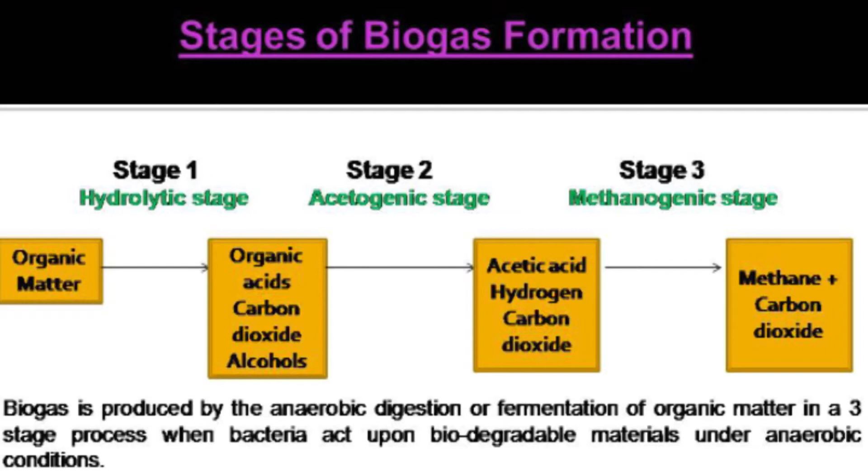Biogas is about 20% lighter than air and has an ignition temperature between 650 and 750 with 20 to 26 megajoules. It is a normal thing. As most of you must be knowing, this is a 3-stage treatment process, from organic matter to organic acids, carbon dioxide and alcohols; that is the hydrolytic stage, stage 1. The acetogenic stage is the next one, and the last one is the methanogenic stage.

Because we have to control the production, that's why I am discussing this. This is done by basically 3 types of bacteria: aerobic, facultative, as well as anaerobic ones. The constitution is the same. It has got some hydrogen, nitrogen, water vapor, as well as traces, but these are the few things I want to discuss specially.

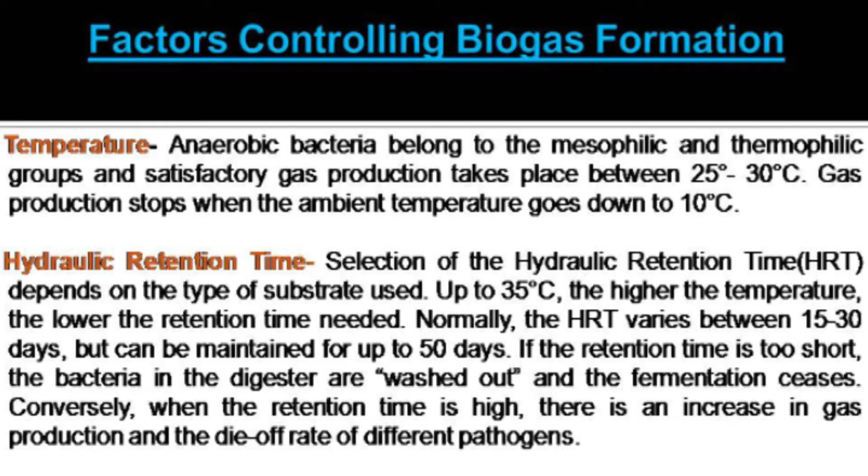Factors controlling biogas formation, especially with respect to our human waste biogas plants. Temperature is to run between 25 and 30 degrees. The best satisfactory gas production takes place in that temperature range. It of course shows that gas production stops when the ambient temperature goes down to around 10 degrees.

But we have installed a human waste-based biogas generator in Afghanistan, attached to a community toilet, where the temperature goes below freezing point. What we have done is we constructed it about 1.5 meters below the ground surface level, and it functions perfectly well in any temperature. It works, and it's still working. It was done about 5 years back.

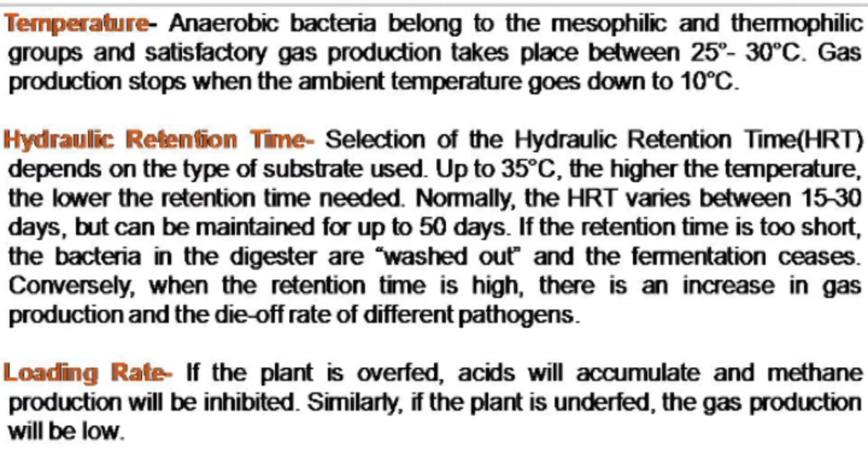Hydraulic retention time. As you know, most of our designs are around 30 days retention time. In India, it works quite well. We have installed, by the way, about 200 human waste-based biogas plants throughout the country. One of them is already located in our premises, that I will discuss later.

And another, the biggest one, is in Shirdi, where 3 biogas plants are working, and daily users are not less than 5,000. Sometimes it goes to 15,000 people using the community toilet system. So we have got 3 digesters over there working. So we can increase this to even around 70 to 80 days also.

But if the retention time is too short, the bacteria in the digester are washed out, and the fermentation ceases. Conversely, when the retention time is very high, there is an increase in gas production, and die-off of the different pathogens takes place. Loading rate is also an important factor. If the plant is overfed, acids will accumulate and methane gas formation will be inhibited. Similarly, if the plant is underfed, the gas production will come down.

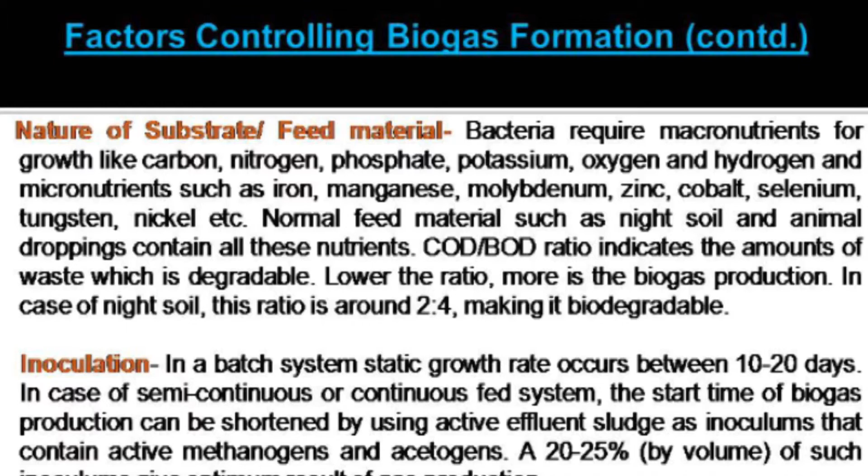Nature of substrate and feed material. Most of the bacteria require nutrients for growth, like carbon, nitrogen, phosphate, potassium, oxygen, and others, which are available in both animal waste as well as human waste. But we are more concerned about the COD to BOD ratio. The lower the COD-BOD ratio, the more is the biogas production. So we want to keep it as low as 2.4. In night soil, it remains around 2.4, which is biodegradable, and it functions pretty well.

Inoculation: in any case, we have to inoculate it, either by gobar or something like that. Generally, we do it by gobar, that is cow dung. And the growth occurs between 10 to 20 days. In case of semi-continuous and continuous flow, it settles down in another 15-20 days, and it functions pretty well. A 20 to 25% volume of inoculum is to be given to get optimum results.

pH is another factor which is to be taken care of in this type of plants. It should be around 7.2 to 8.2. Below 6.5, it stops functioning, so control measures are to be taken.

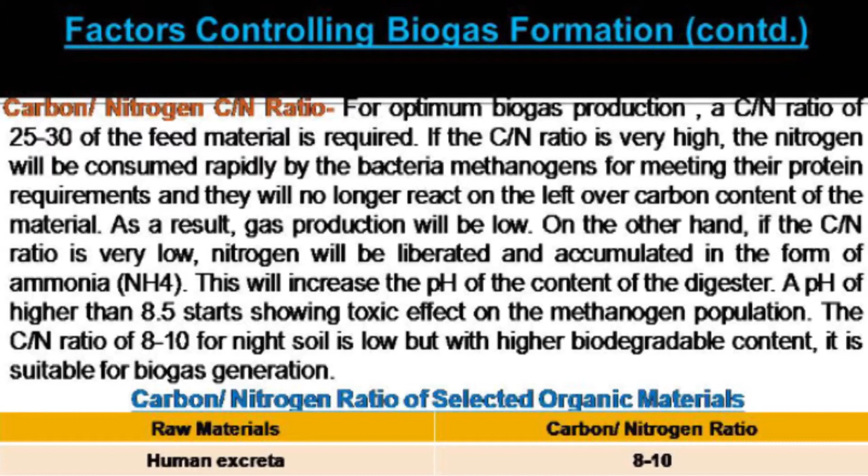Another major factor is the carbon and nitrogen ratio. The optimum C/N ratio for biogas production is between 25 to 30. But in human excreta, the first figure there in the presentation, it's around 8 to 10. But still it functions, and we are getting a good quantum of biogas, and at least we are able to use it regularly.

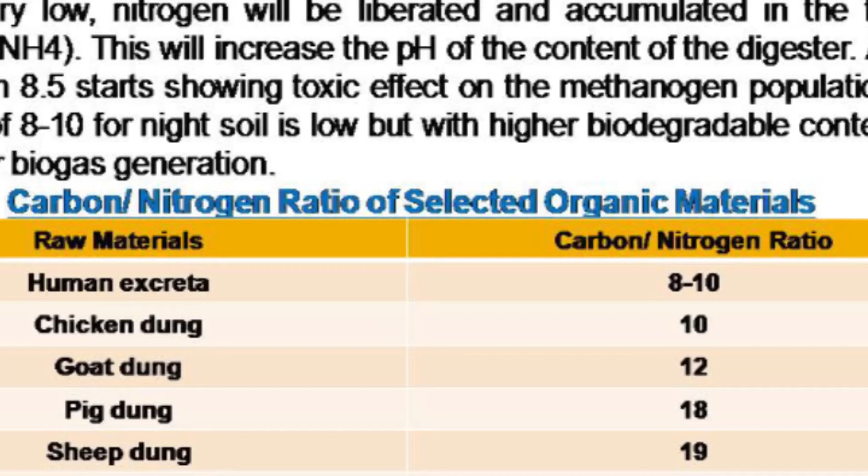Though at that ratio it is functioning pretty well, and we find that this is good for human waste, but not for other waste. Maybe in chicken dung and others the ratio is low, maybe mixing, but we have not experimented with that; this could be discussed separately.

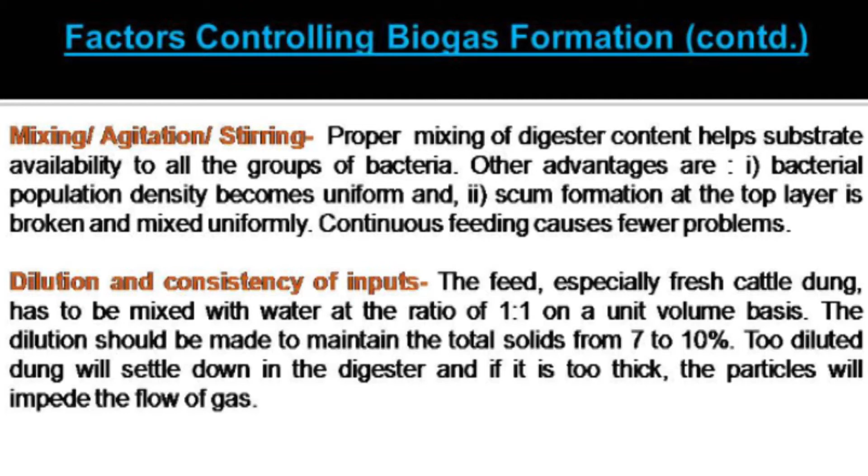Mixing and agitation is required. Agitation and proper mixing of digester content helps make the substrate available to all groups of bacteria. The bacteria family population density becomes uniform and scum formation doesn't take place.

Dilution and consistency of the inputs. In case of cow dung, of course, it is required. But in case of human waste, dilution is a big problem. Because it doesn't work, we have to have low water availability, and that is a bigger problem. That I will discuss later.

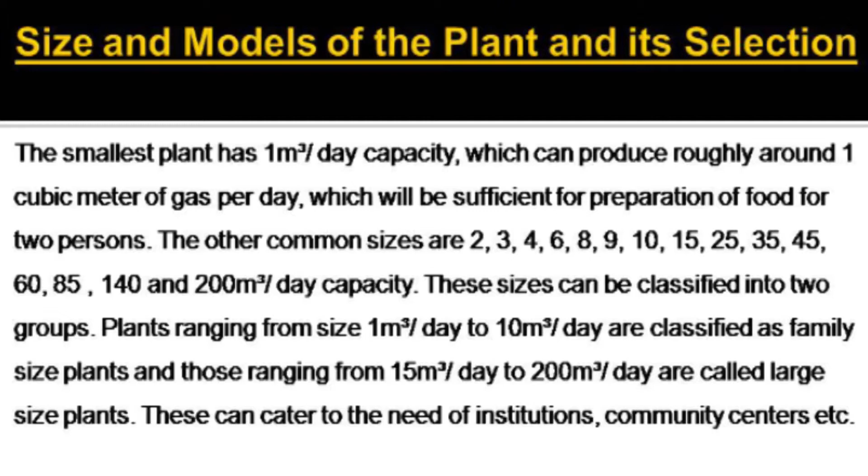These are the capacities of plants, 1 to say 140, 200, 400, whatever is available. But it is very difficult to have big human waste-based biodigesters because the quantum is so small, and to carry that from a long distance is a very difficult job, and because water content has to be kept low.

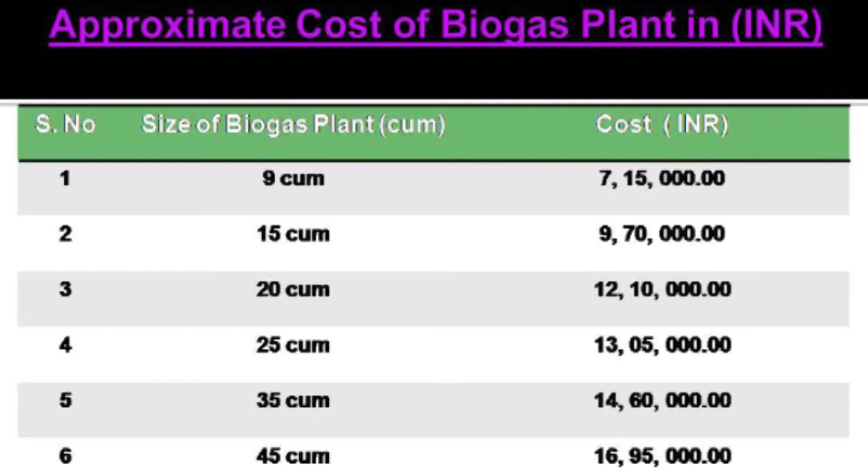These are the basic costs of biogas plants that we have designed so far, from 9 cubic meters to, say, the Delhi plant, which is around 35 cubic meters. It was constructed long back, in the 80s, as I mentioned.

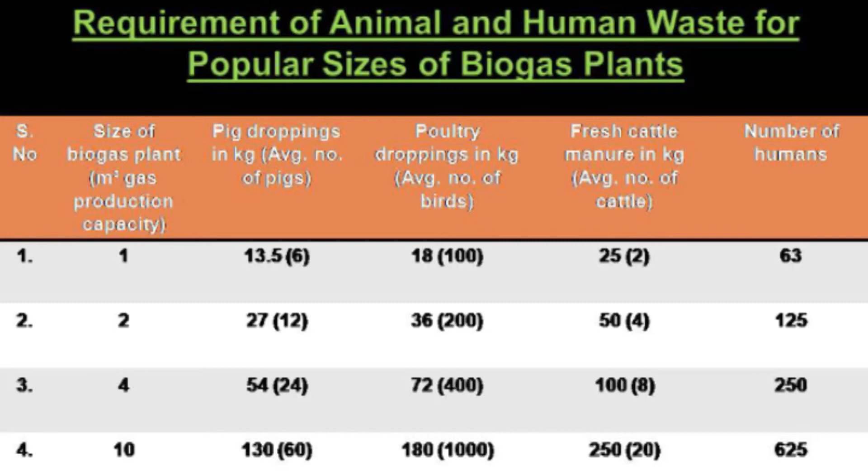It's a huge number. To get the waste collected, and that too in a low water content, and to bring it to one spot for treatment is a big issue. I have myself faced this problem. We were designing for Delhi Police College; they have barracks, each with 200 people, and presently they are asking for 1,200 people to be served.

Now, to get the waste flowing from the last barrack to the treatment plant, we have to go down by about 3 meters first. Then again, since water used in those toilets is very low, as required by this type of digester, making it flow is a big issue. We have to flush it. And we are trying to add some other waste, maybe cattle waste, to make this digester functional. So we are designing for that, and we are finding it difficult, in fact.

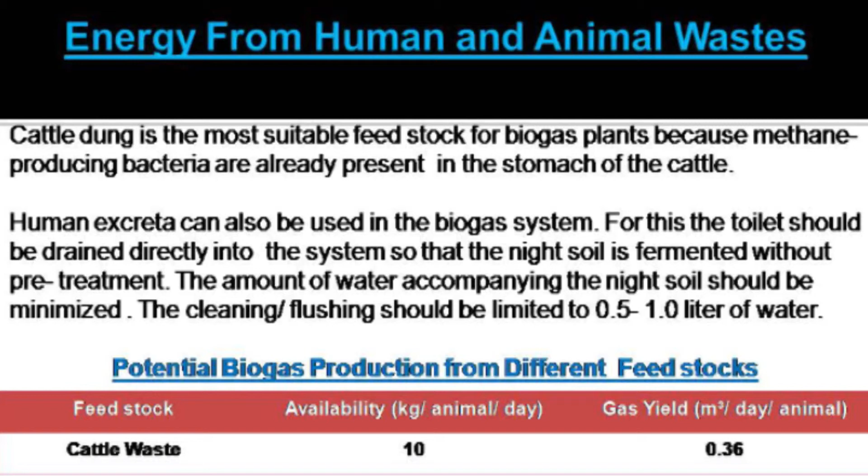As in the next slide, each animal provides 10 kilograms of cattle waste, and it gives 0.36 cubic meters of gas per day. Whereas a single human generates about 0.4 kilograms of waste, and the gas generated is 0.03 cubic meters. Flushing should be limited to 0.5 to 1 liter per capita per wash. So little water, so small a quantity of waste, it is a difficult job.

So we have to flush it occasionally. And if you flush it, the quantum of water in the digester goes up, and we have to have another sort of waste added to make the digester functional.

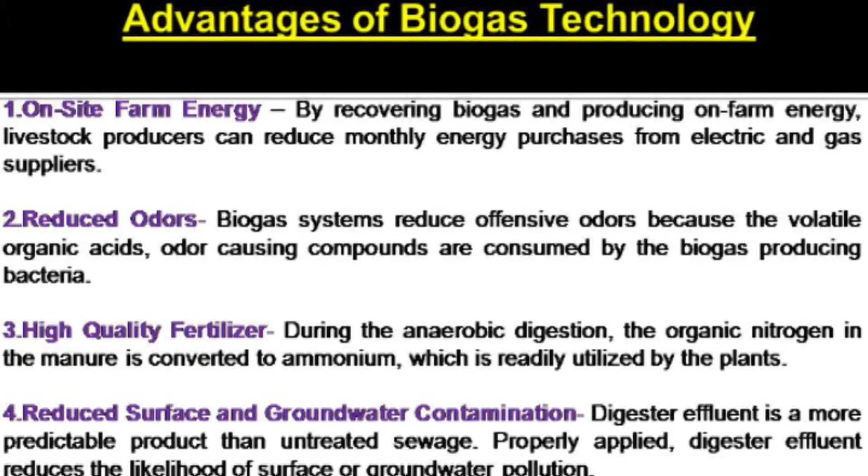There are some advantages, of course. Most of you know about them. On-site farm energy, this has been discussed since morning. Reduced odors. High quality fertilizer, that is the biggest advantage of this digested sludge, which could be directly used, and reduced surface and groundwater contamination.

And the pathogen reduction is very high. If your digester works pretty well, you can remove up to 85%. But if your water is hard water, this percentage comes down, which we are witnessing in our treatment plant.

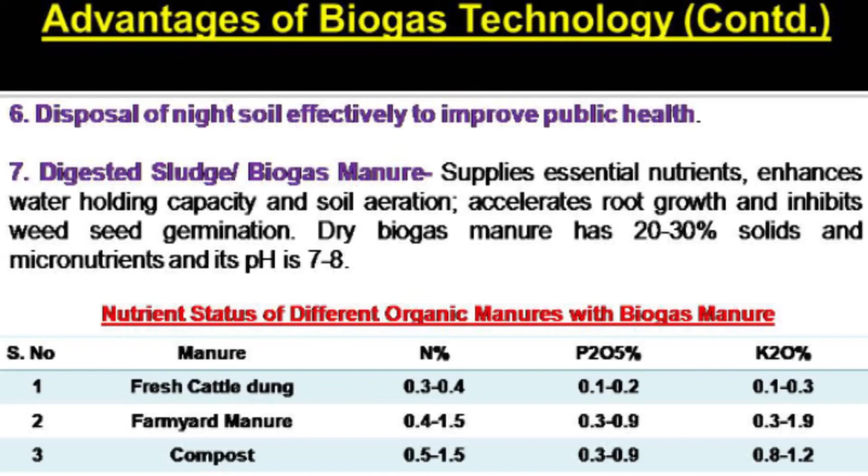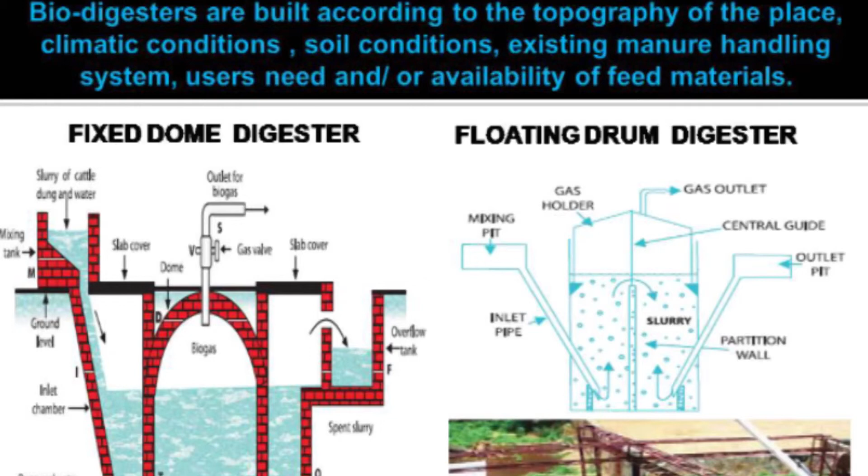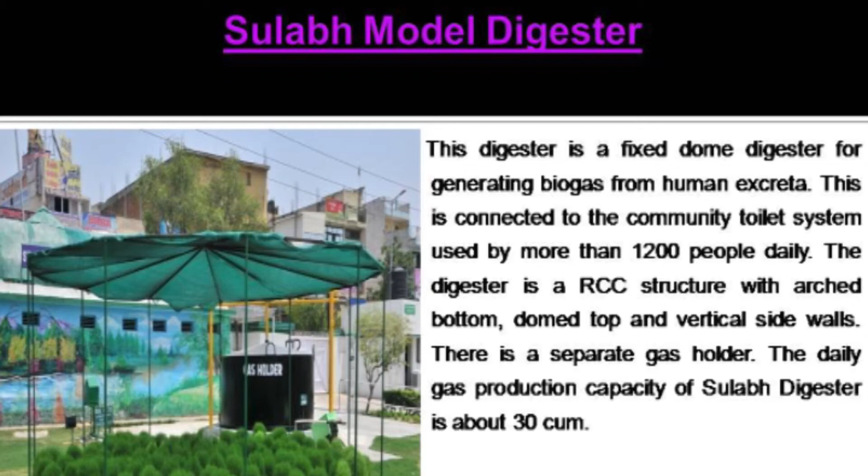All the waste from that comes to our digester, which is about 15 feet below ground. The plants that you see, the digester is below that. And because this was constructed about 30 years back, we had a separate digester and gas holder. The one you see is that gas holder over there. It is written gas holder, the black one. Now this is about 30 cubic meter capacity.

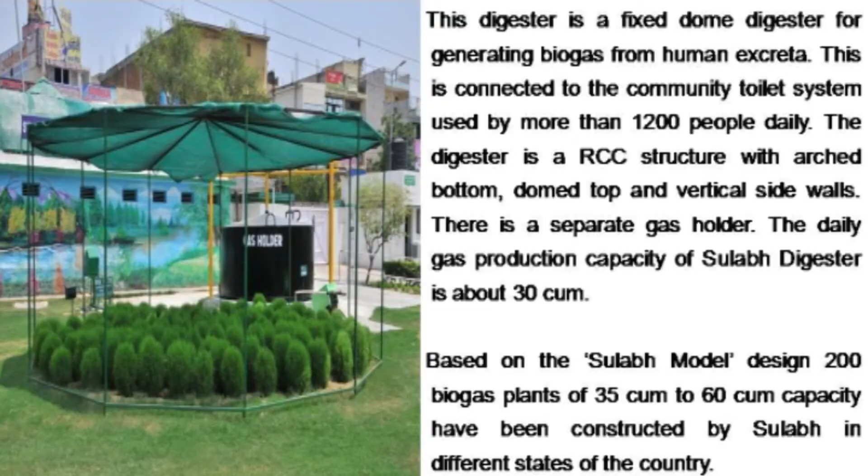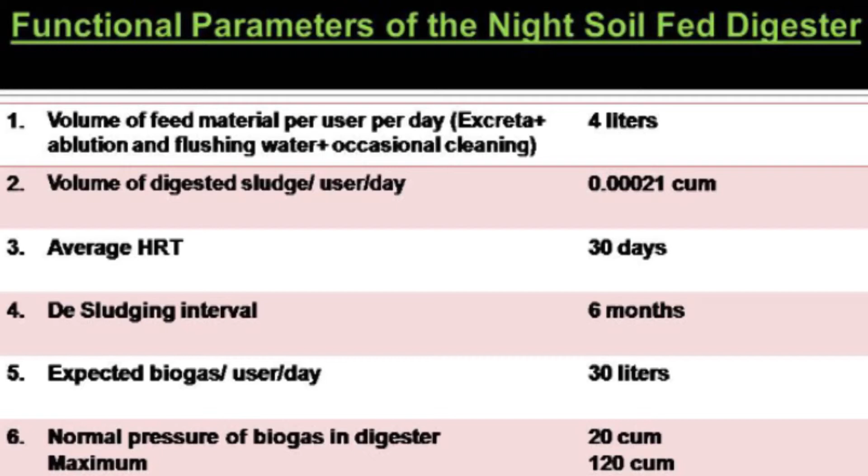And as I have already mentioned, around 200 of these have been constructed. This one is an RCC constructed one. These are certain parameters which we used to design our systems. The minimum flow we are taking is only 4 liters per day. I'm not going to explain all these things. The gas storage space is around 50%, feed material flow is gravity flow.

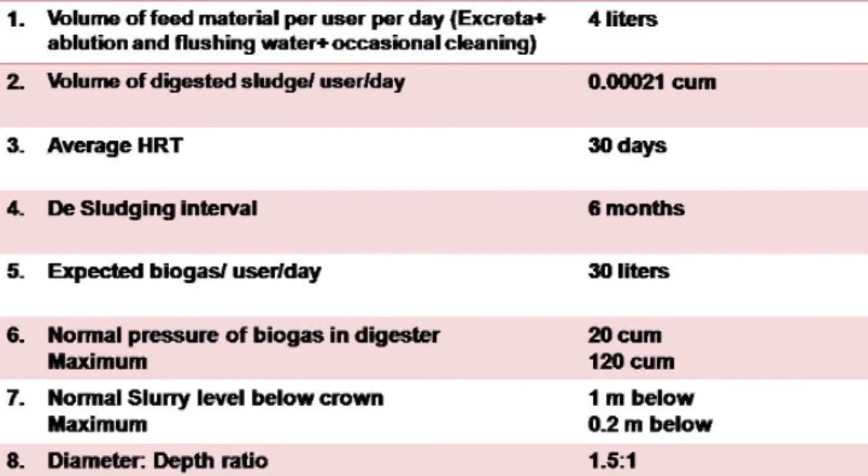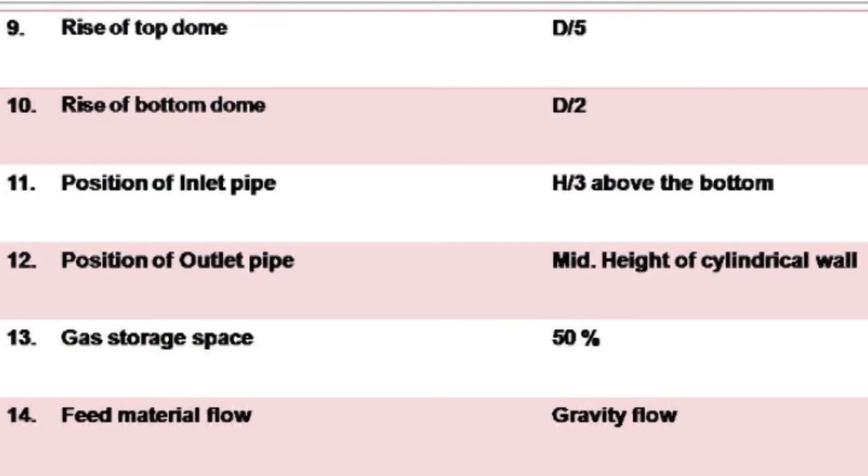In case we are thinking of having human waste as well as animal waste combined, which is feasible, and there is no problem, hopefully not. At least people will use it, thinking that it is animal waste and not human waste. Then we have to see that there should be separate pipes for inlet. The human waste one should be lower than the animal waste one, because otherwise backflow will take place, because the quantity is low.

So what we have designed is that the human waste pipe, which is taking the waste in, is lower by a foot or 1.5 feet than the other one. Now we have used this biogas for many purposes, like mantle lamp burning, but regularly we use this gas for cooking purposes. Every day food for around 40 to 50 people is cooked with this gas, and we consume around 7 to 8 cubic meters. We don't require more than that.

Then there are various factors. We have also got a generator, but we don't run that regularly. It is more for demonstration purposes. Earlier we had diesel plus biogas, but we have converted it; now it is completely biogas without any sort of treatment. We are using it directly in that generator, and it works pretty well. Ours is more of a demonstration pilot project, not a regular working project. But cooking with gas is regularly being done. The others are just to show that you can do this.

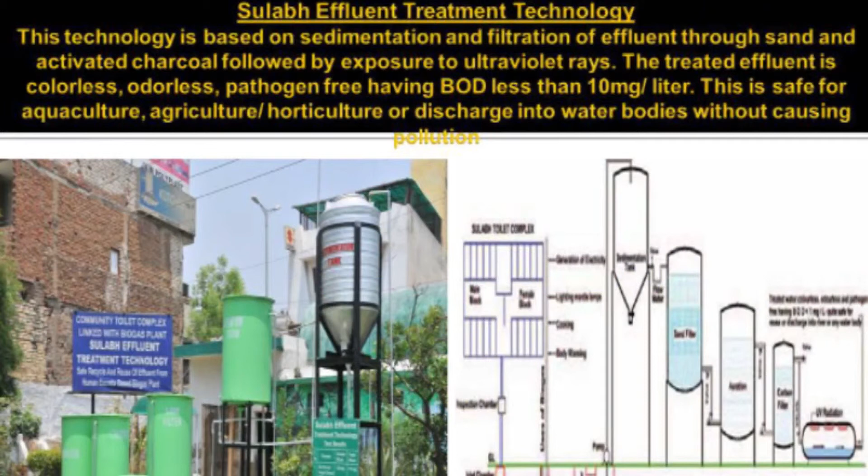This is another technology that we have, for the effluent coming out of the digester. We recycle that water through a sedimentation tank and filtration, then activated carbon and UV tubes. And the BOD is brought down to around 10 milligrams per liter, or 10 ppm you can say. We are using about 2,000 liters of water, and we recycle the whole thing. The sedimentation tank has 1.5 hours settling. Activated carbon, around 10 minutes of passing time. And then filtration and aeration also.

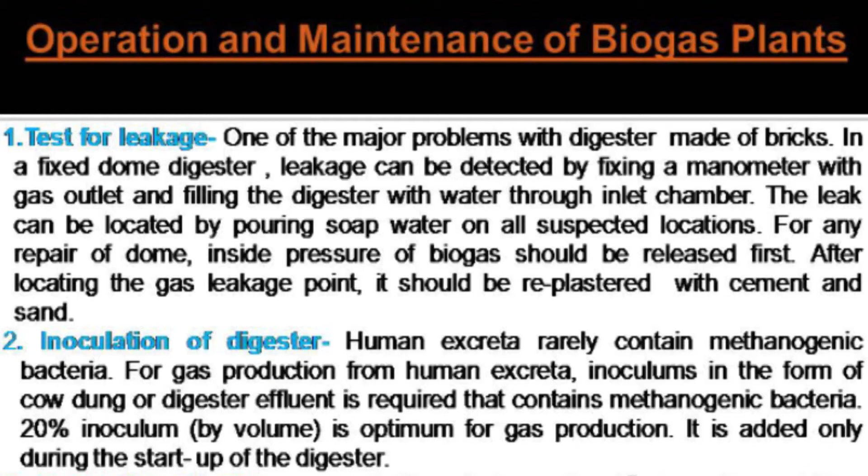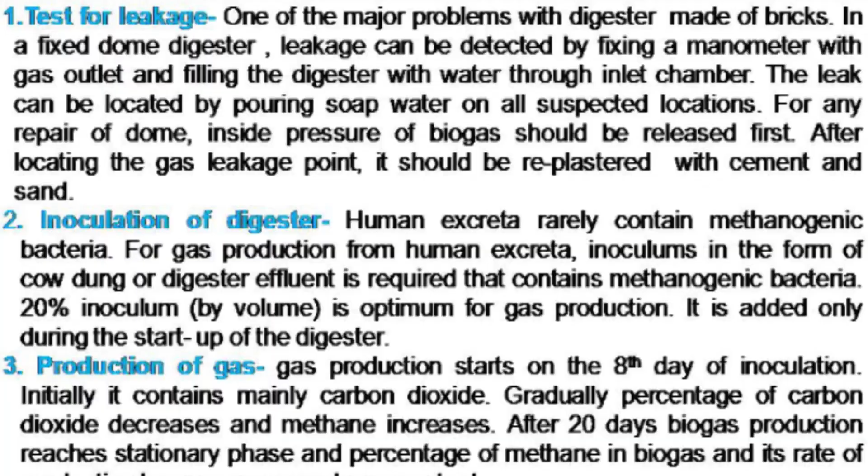Then there are some problems that we are facing regularly, because a lot of our plants are located almost all over India. Especially leakage in some cases, but whenever we have an RCC one, there is less leakage. But anyway, that is to be taken care of. Inoculation of the digester has to be done regularly if it is not coming through, because we are not always getting the quantum of waste we require to run the system.

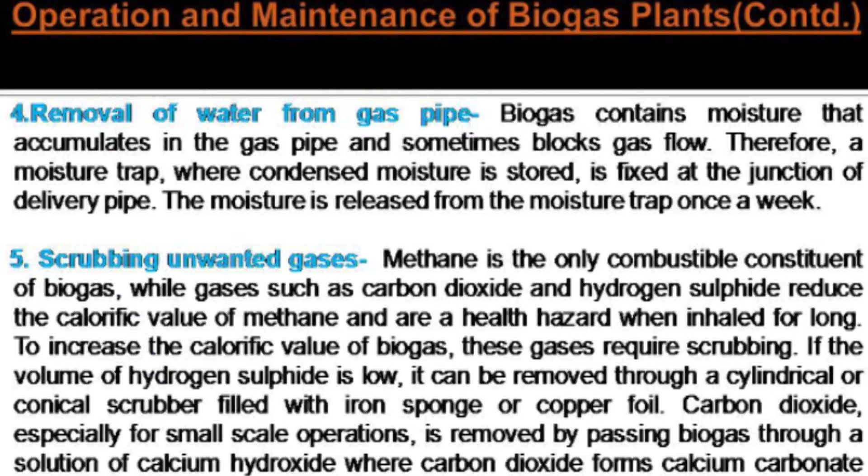Gas production generally starts on the 8th day of inoculation. Initially, it contains more carbon dioxide. Gradually, the percentage of carbon dioxide goes down, and by 20 days it functions pretty well with methane. We remove the water from the gas pipe by traps that we have already provided. Scrubbing of unwanted gases has already been discussed; it is the same thing. There is nothing new in that.